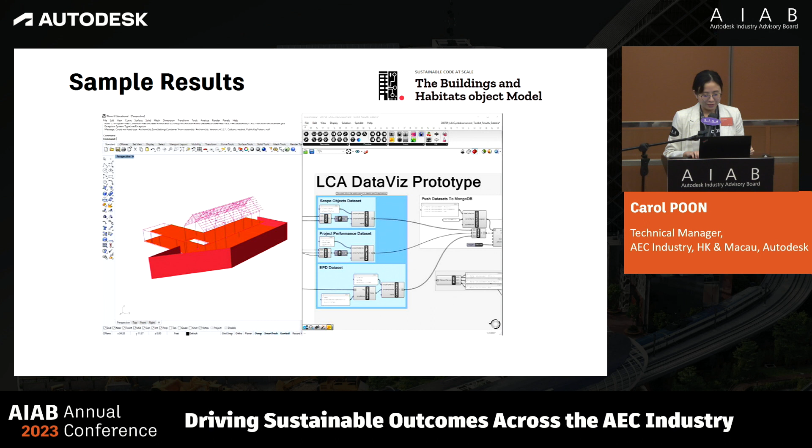I'm talking about Rhino. How about Revit? Actually, we have some tools, which I will introduce later on, that can combine Revit and Dynamo together. Let me show you that website. You'll see it again in the later pages. We have a package for Dynamo to help you calculate this information.

Let's take a look at another AU class, by Tressler Collier, about the streamlined process of decarbonization.

In her presentation, she clearly explains what embodied carbon is, breaking it down by material extraction, materials manufacturing, transportation, and building construction. Different stages contribute to carbon emissions. We also have operating carbon, which comes from lighting, ventilation, water heating, cooking, refrigeration, etc.

And we have carbon offsets, which is like a formula. When all these elements and components add together, we get the total net carbon impact of your building project and components.

She also mentioned some workflows and a toolbox for BIM. Focused on embodied carbon, she mentioned the tools shown in the upper box, using them for calculation: Revit, Dynamo, some plug-ins, and the EC3 calculator. For operational carbon, similar tools are used for calculation.

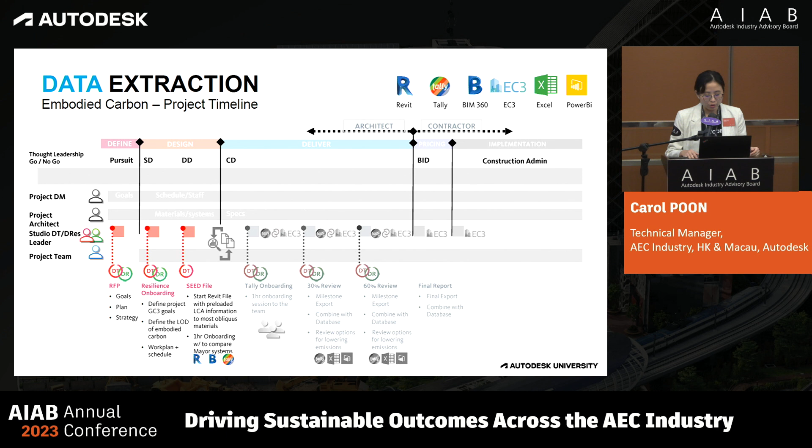She even has some templates for Revit to kickstart the whole workflow. In her Revit file, she has settings for different elements, each with different filters or parameters.

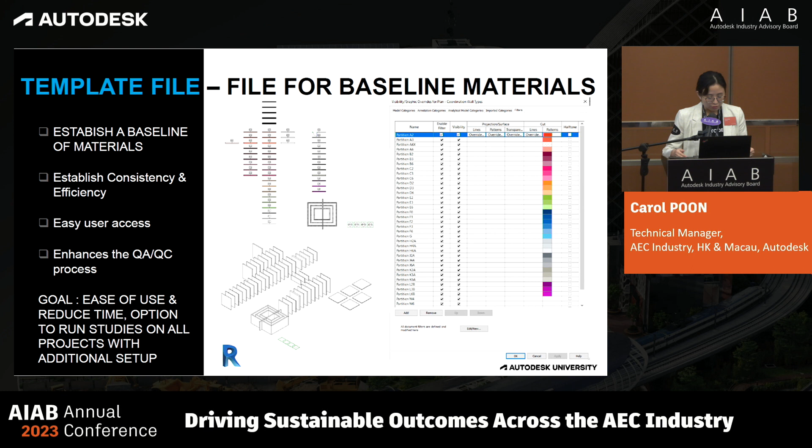Okay, the next class I want to share is from Justin and Marcel: 'There's No Planet B, Sustainability's the Key.'

In this class, they demonstrate how to use Dynamo and Revit to calculate embodied carbon. For Dynamo, there's a library, a package you can download, and apply to all your building objects in Revit, then get a schedule, an Excel table.

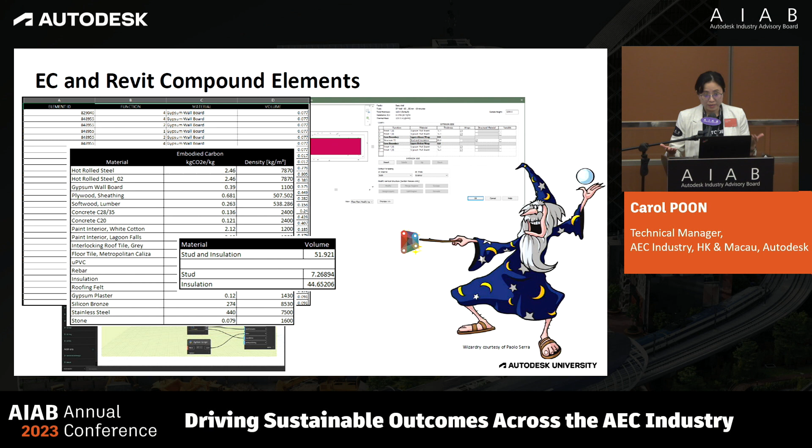This table shows the kgCO2e and the density for each material in your project. After getting this information or data, they extract it from Revit and put it into Excel or Power BI for a more comprehensive chart or presentation, showing which materials have the heaviest ratio of carbon dioxide emission.

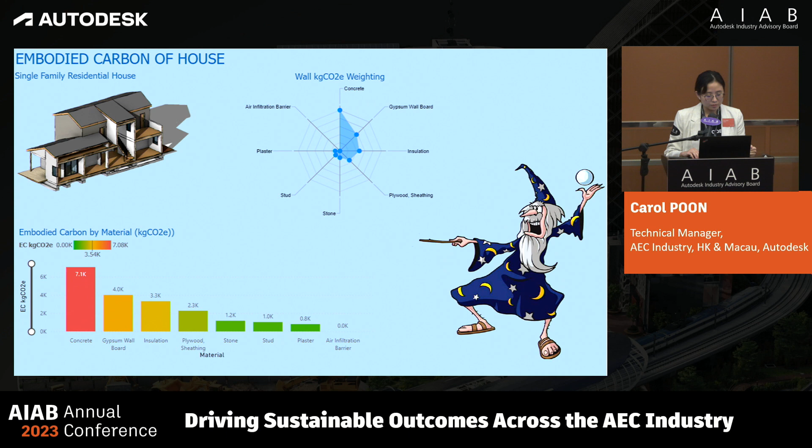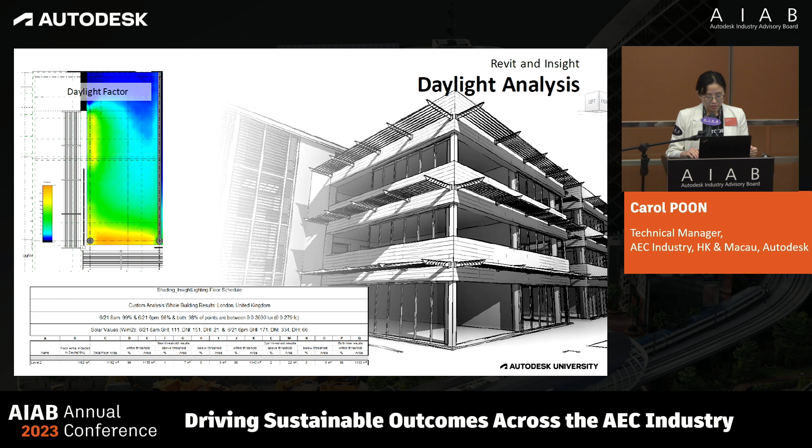In the same project, they also make use of the Revit plug-in function for data analysis: the daylight analysis function and the artificial lighting analysis.

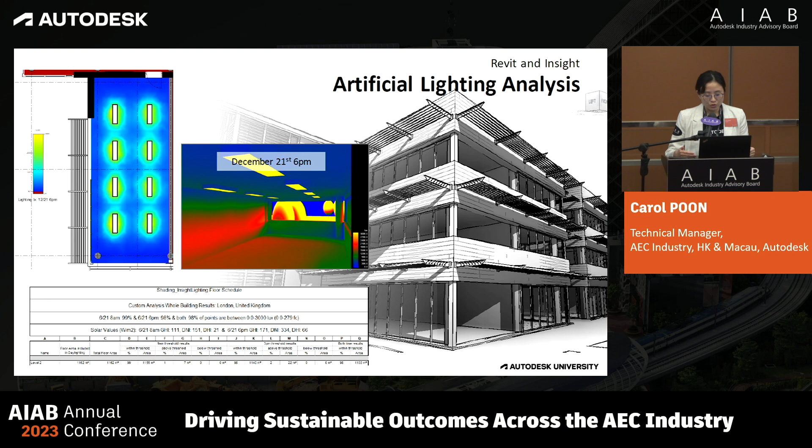This function is also available in our Autodesk gallery, just in case you want to try it. Also, not just existing information for you to evaluate your building performance, you can also predict future energy consumption or performance by using our Insight.

Insight is a cloud platform, a cloud program to help you analyze your building elements and energy consumption.

The first stage, the basic stage of digital twin, is the descriptive twin. The second is the informative digital twin. The third is the predictive digital twin, etc.

As our technology advances, we can reach the informative digital twin, where not just the information we input manually, but we also connect information with sensors, IoT sensors, BMS systems, and CMMS systems. Then all the information can be reflected on a dashboard.

We can access this information anytime, anywhere, giving us better insight and better cost control for sustainability development.

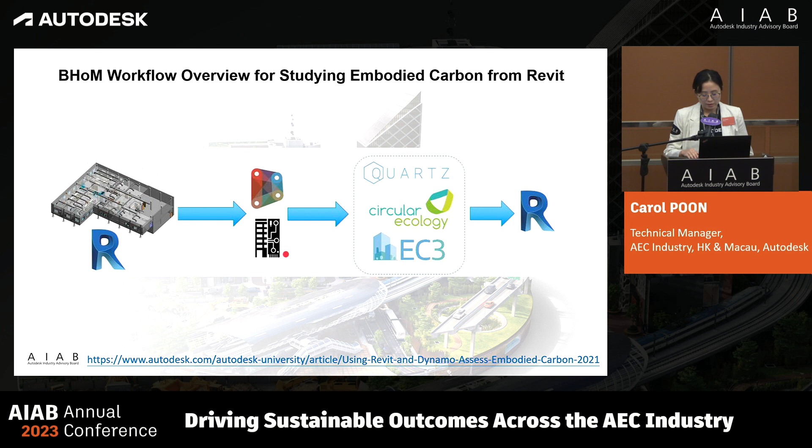So this is the script. This is the full script for the BHoM.

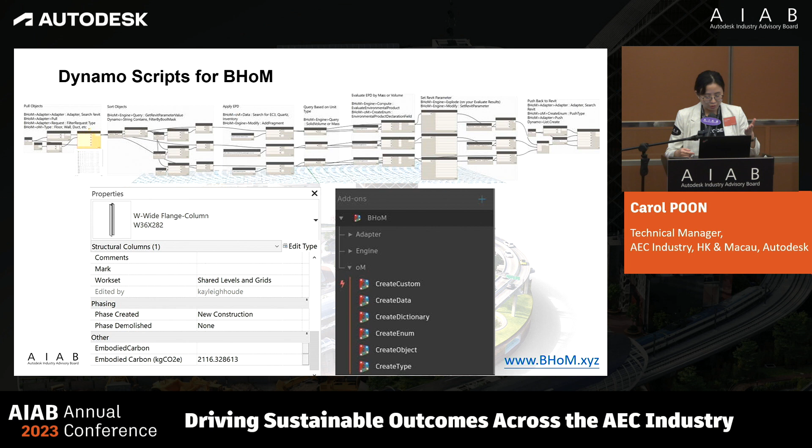Once we have processed this Dynamo script, for example, you can see this column. In this table, the left-hand side shows the properties of this column, and then you can see categories such as structural columns, phasing, and other. In the other category, you will find two parameters such as embodied carbon and embodied carbon KgCO2e. It will show you the data after you run the Dynamo.

Last but not least, our new product SpaceMaker can also help you define or improve your design, making it more sustainable or environmentally friendly in the early stage. So I'd suggest you take a trial on this website for now, which is available for the Hong Kong market.

It's somehow like InfraWorks. I'm not sure whether you've tried InfraWorks, but this is more intelligent, and the purpose is totally different.

And the big news of this software—I tried it two months ago. When I generate different options, I can generate over 100 options by AI in SpaceMaker. Then when I select the most optimized option, I can just input or link it to Revit.

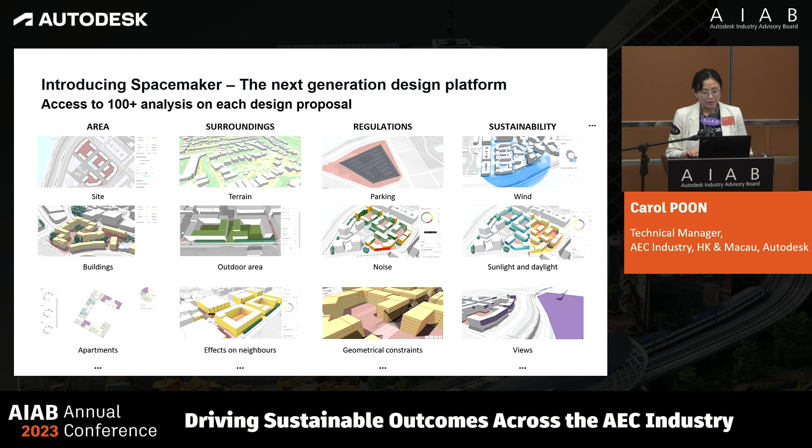But it is feasible, though not ideal, because there's some data loss, or the outcome isn't beautiful enough. So I'd suggest you try it. It's somehow like FormIt, our conceptual design stage software for BIM.

So let's take a look at this. Inside this software, we also have some simulations, such as noise simulation, visual surrounding simulation, and also daylighting simulation. We also have microclimate analysis in this software.

I think this is quite interesting, because it shows you how the climate interacts between buildings and buildings.

There are some cases when you go to the SpaceMaker website—there's a lot of information there, so I'll skip this part.

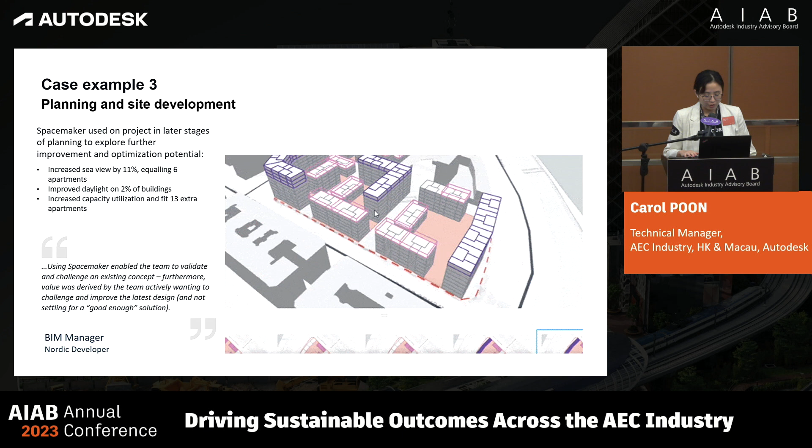Okay, finally, if you're really interested in what I've mentioned in this session, please go back and check out Autodesk University for these 4 classes. Okay, and that's all for my sharing. Thank you so much.